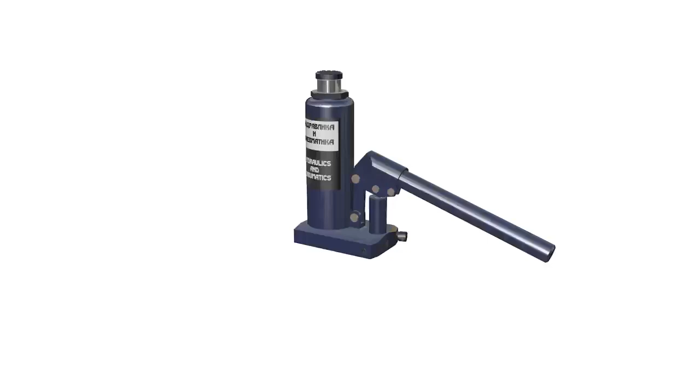Hydraulic jack. How it works.

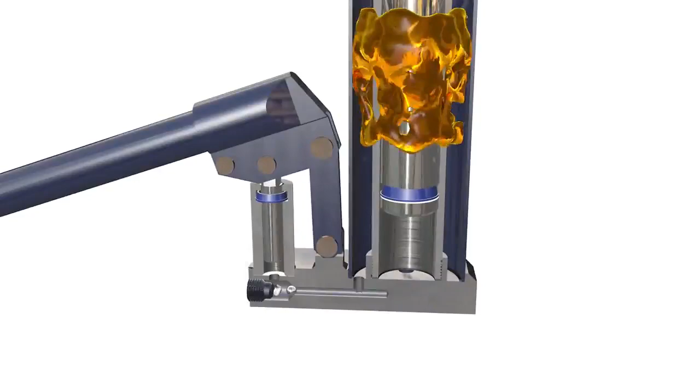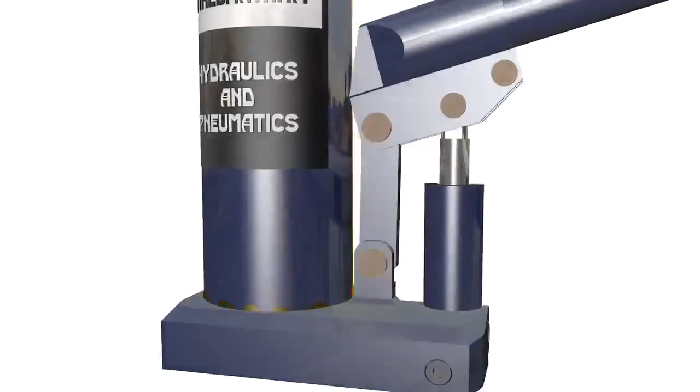A hydraulic jack is a mechanical lifting device used to apply great forces or lift heavy loads. This jack uses hydraulic power. The most common form is a car jack or floor jack, which lifts vehicles so that maintenance can be performed. The more than tenfold increase in force produced by the hydraulic jack is sustained by the hydraulic lever principle.

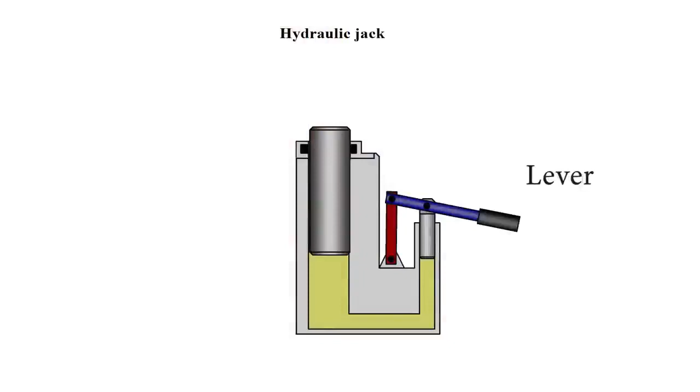Let's try to understand how a hydraulic jack works, taking the bottle jack as an example. Lever 1 is positioned in such a way that the arm between the pump's plunger and the axis is smaller than the arm between the axis and the handle to which the force is applied. In this case, the mechanical lever principle is utilized, which allows the applied force to be magnified several times.

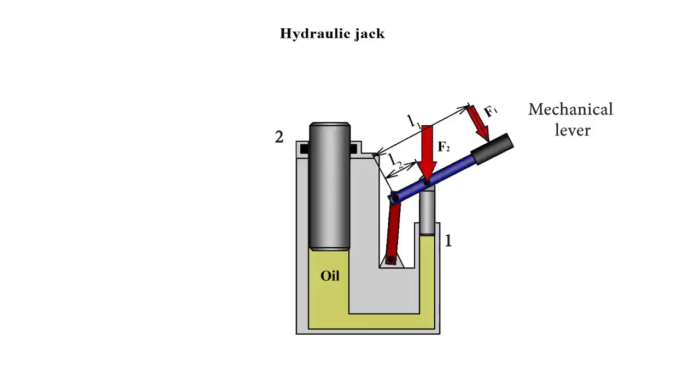With the help of a mechanical lever, a force is applied to the small piston, making it move downwards. The pressure under the piston will be calculated as the ratio of this force to the area of the surface of the piston. According to the laws of hydrostatics, the pressure applied to the surface of a liquid is transmitted equally in all directions to all points of this liquid. This means that the same pressure will act on the large piston. The pressure on both pistons is the same, but the area of the surface of the larger piston is larger. Therefore, it can sustain a larger force.

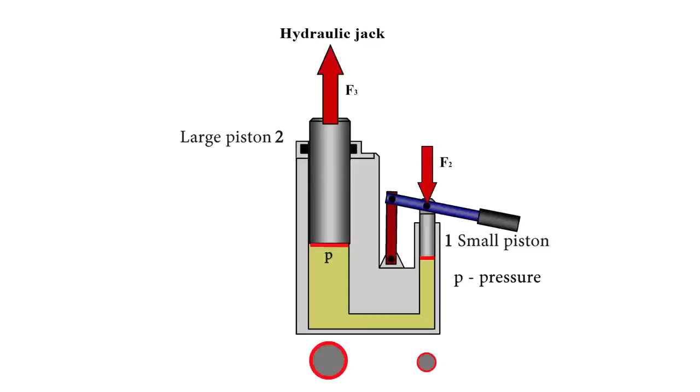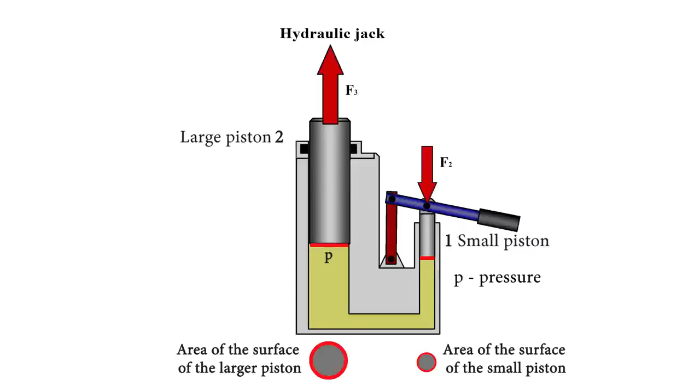The larger the area of piston 2 and the smaller the area of piston 1, the greater the amplification factor that can be obtained by using the hydraulic lever. The total displacement of the large piston will depend on the volume of fluid displaced by the small piston. The area of the surface of the second piston is larger. Therefore, the distance it is displaced by will be less than the distance that the first piston was displaced by.

It follows that the hydraulic lever allows you to increase the force you apply to it. But at the same time, the movement of the larger piston is very small. To move the large piston further, a new portion of fluid is necessary. But where does one get it?

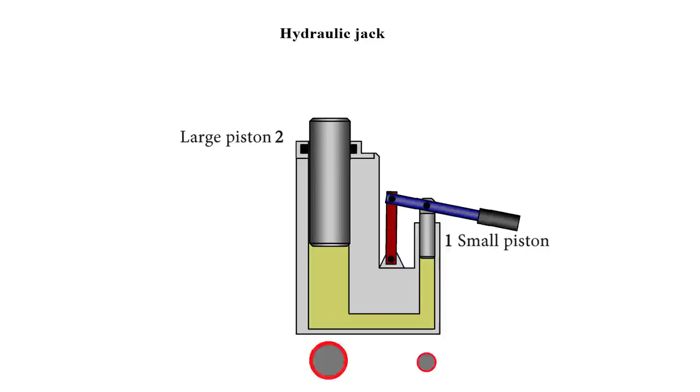Let us add a tank and 2 check valves to our device. The check valves allow fluid to flow in one direction and do not allow it to flow in the opposite direction. Now, when we pull the handle upwards, the small piston will move upwards as well. The volume of the space underneath will begin to increase and the pressure will drop. Valve 1 will let fluid out of the tank and into the space under the small piston. Valve 2 is installed in such a way that it does not allow fluid to flow out from its place under piston 2.

When the small piston reaches the top, we will begin to put pressure on the lever again. Valve 1 will not let fluid into the tank, and valve 2 will allow fluid from under the small piston to flow into the space under the large piston, which will move up a little more. This cycle can be repeated many times.

The lever is moved up and the cavity under the pump's plunger is filled. The lever is moved down and the liquid is forced out into the space under the large plunger. If the load needs to be lowered, the release valve is opened and the large plunger moves downward under the effect of the load's mass, while the liquid from under it goes into the tank.